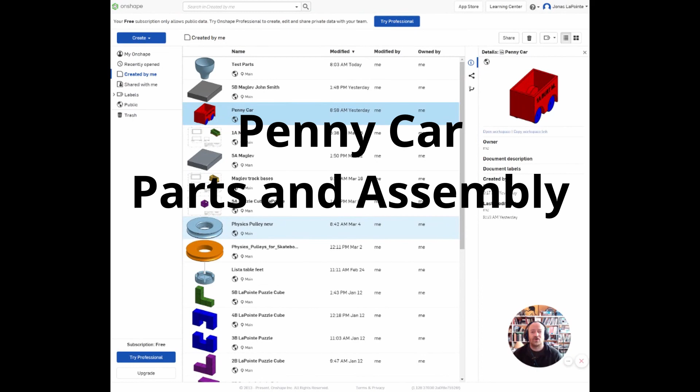For this project, make sure you review the instructions for dimensions in case they have been updated.

Let's get started. Just like all of our other projects, we're going to go up here to create a document. Let's name this your class period, penny car, and your name.

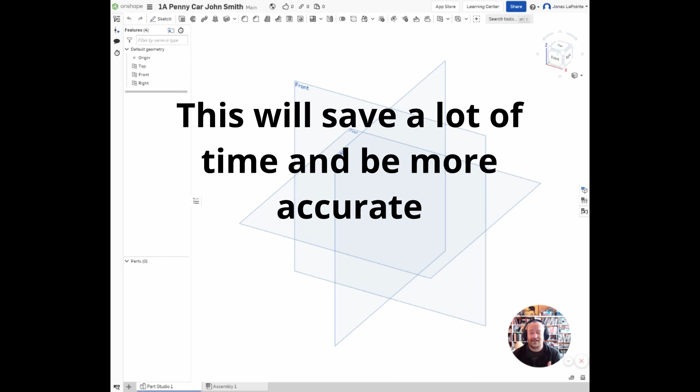Create public document. We're going to get this going in a similar way to some other things. One thing to point out with this project is we're actually going to only make half of the vehicle because we have to do some complicated things, and then we're going to mirror it. So we make half of it and then copy it to itself as a mirror image. It makes the process a lot faster. You don't have to duplicate the exact same commands on both sides, so as we get going here, you'll see what I mean.

So sketch is our first option, and we're going to do it on the top plane because we want this sitting on the ground. And we're going to use a rectangle tool, and again, just like normal, just drop something and we'll tell it how big to be.

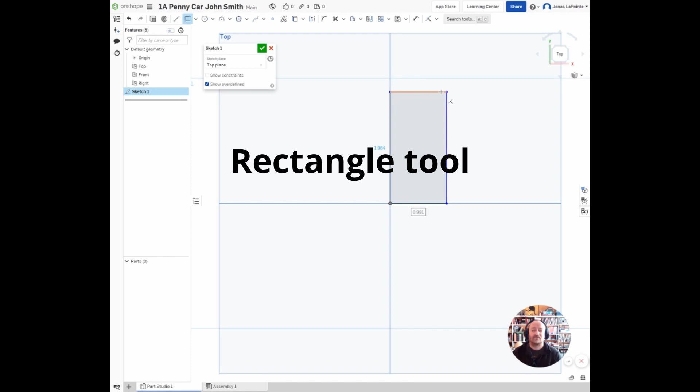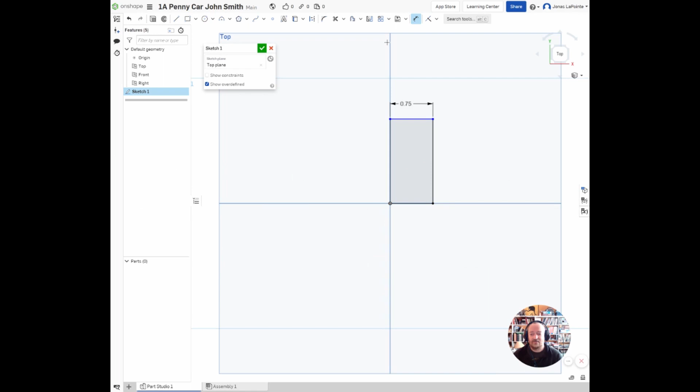Looking at our instructions, the width of the vehicle can't be more than 1.5 inches. Because we're only doing half of the vehicle and mirroring it, half of 1.5 is 0.75, so we'll use 0.75 for this. Our length is no more than 2.5, so we'll max it out since we want to maximize our cargo. So 2.5 for this. Now we have a rectangular shape and we're done with the two-dimensional sketch.

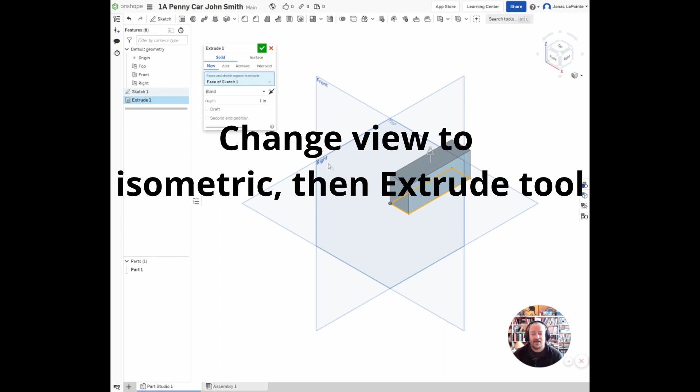We'll make it isometric and extrude this shape. The height you guys have some flexibility with. For my example here, I'll probably just do 1.5 inches. Don't worry that it looks extra narrow and tall—that's because it's only half as wide as it's going to be.

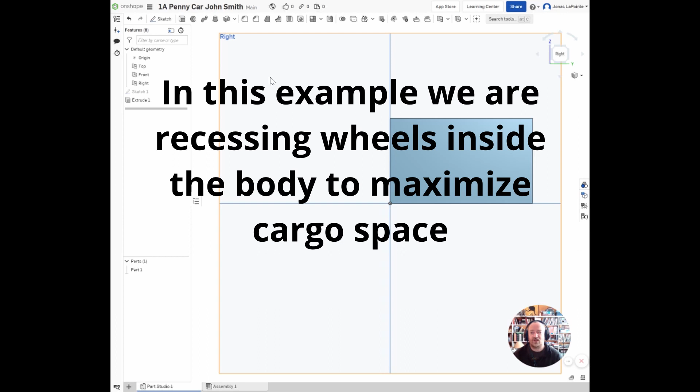All right, so that's done. Now we're going to do a couple things. We need to have somewhere for axles to go on this vehicle. We need to have the wheels in here, but remember our max width is 1.5 inches, and that includes the wheels. So we can't have the wheels stick outside this shape if we want to maximize our cargo. So we're going to cut wheel wells into this shape.

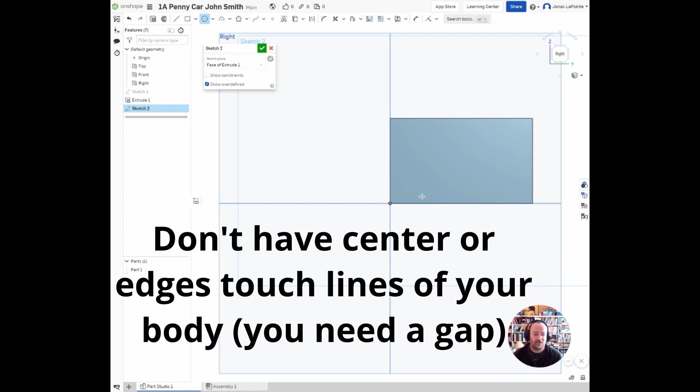We're going to use the sketch tool and choose this face, and I'm going to use the circle, center point circle tool. It's really important that when you draw this, you don't start it on one of these lines, because we need somewhere for the axles to go. So we're going to start it up a little bit and just draw something here, and we'll do the same over here. Don't worry about the exact size and placement yet—just make sure it's not touching those lines.

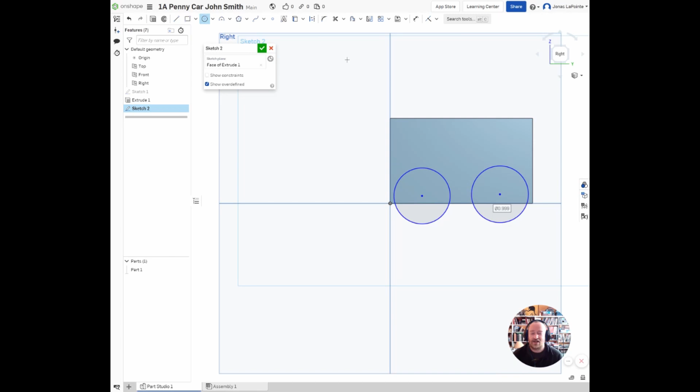Now, you need to have a little bit of ground clearance—at least over 1/8 of an inch. So we want to plan that in. You have lots of flexibility about what you do here. For this example, I'm going to make 1 inch wheel wells, so 1 inch, and I'll do the same with this one.

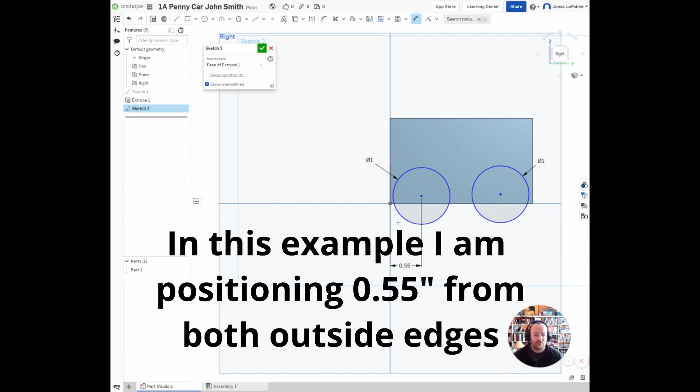Now I want to position these, because right now they're not in the same locations symmetrically to each other, and I think I want to do that. So I'm going to select the center point and the outside edge, and let's just make this some sort of standard dimension—0.55 is probably good, since I want to leave a little bit of a gap from the edge. We'll do the same over here if we want to make it symmetrical. It doesn't have to be symmetrical, but I'm choosing to do that. The other thing is, to fix a point in space, we need to do the X direction.

We also have to do the Y direction, so we're going to do center point to the bottom. Let's just make this 0.125, that's 1/8 of an inch. That's going to look pretty good. Same thing over here, I'll bring it up here, 0.125.

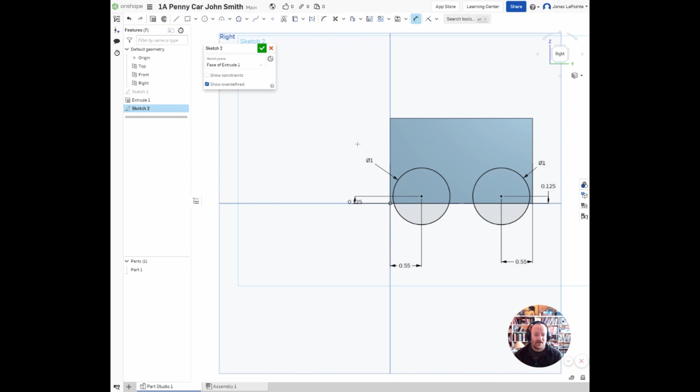So those are symmetrically placed, identical size circles, and we're going to use this sketch twice. Right now I'm going to click the green check.

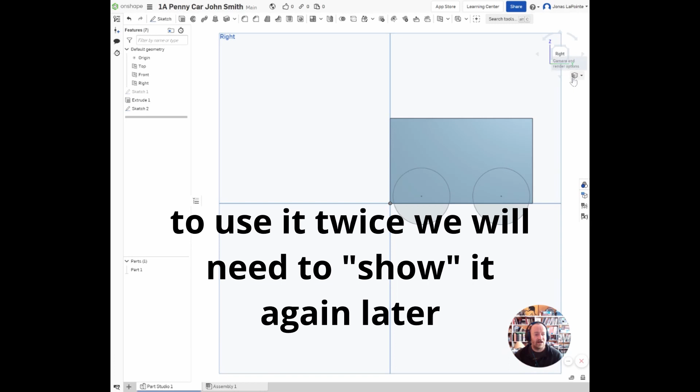We can see it's kind of ghosted out gray, we haven't done anything with it. It's showing up over here, still dark. But the sketch we did before is grayed out because it's consuming it. We can turn it back on to see it if we need to do something else, and we're going to be doing that with this sketch 2 here. So we're going to go isometric mode just to see what we're doing.

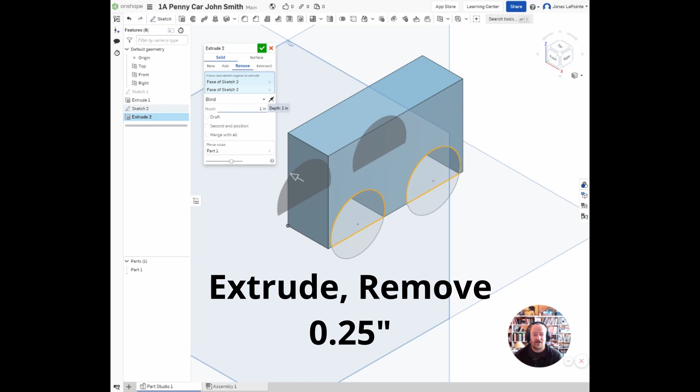I'll zoom in here a little bit. We're going to do extrude, and the first thing I'm going to do here is click on the circle and this circle. The order you do this doesn't really matter. Then we're going to click remove, and we can't go that far, but I'm going to want to go in 1/4 of an inch. I'll hit enter, and that's going to look pretty good.

So 1/4 of an inch, I'll green check that. And you notice that our sketch 2 grayed out, but we can click this to show it again.

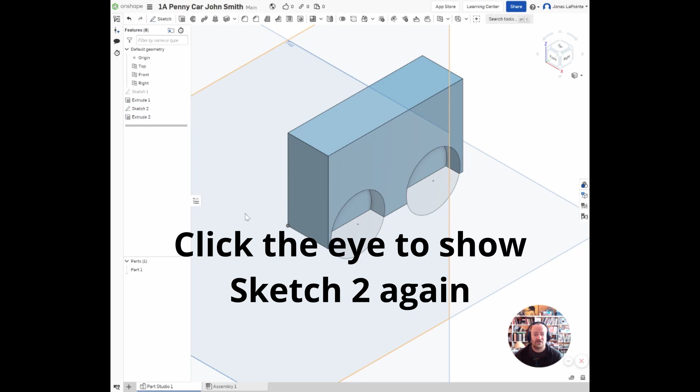So we want to do something else. We want to put in some holes for the axle. So we're going to show this, and we've got the ghosted out circles with the dots for the centers still in here again. So I'm going to click on the right face so we can work with this.

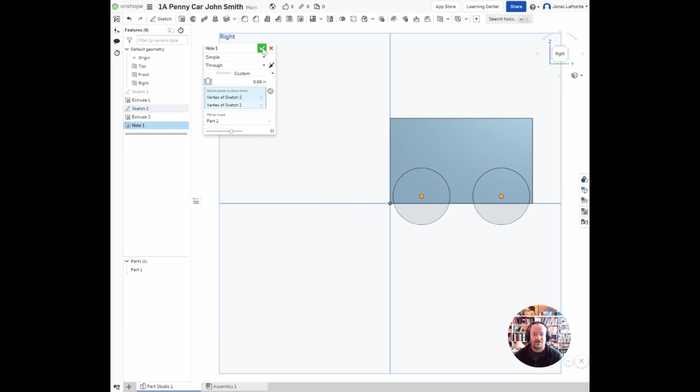And I can now go back to the sketch 2 and hide the visibility just so it's not kind of annoying when we're looking at it. So right now you can see that I have a half of a car that has wheel wells and axle holes.

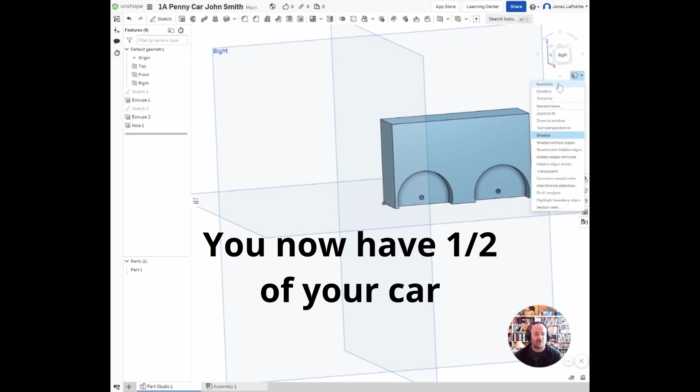Now this is the cool thing we're going to do next. I'm going to switch to isometric mode. What we want to do now is make this a full width vehicle, so we're going to use this tool up here called mirror. It's asking us for a couple things: what entity do you want to mirror? Well, click on your shape because that's what we want to mirror.

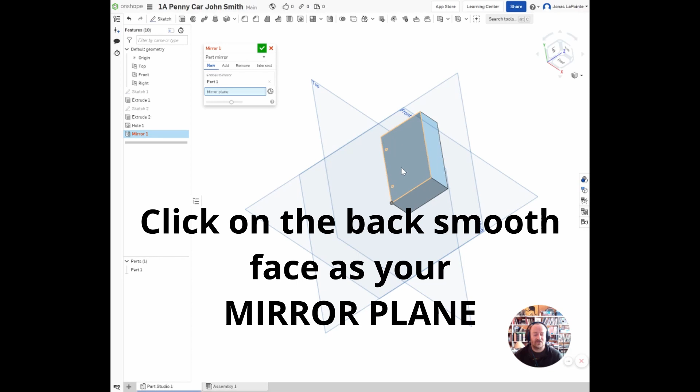And then the next thing is mirror plane, and we're going to roll over here to the back and click on this face that has nothing on it. And then we've got this whole thing here, green check and isometric, and we have now a full width vehicle. We didn't have to do those commands for the axle holes and wheel wells twice because we just mirrored half the vehicle. Highly recommend doing it that way.

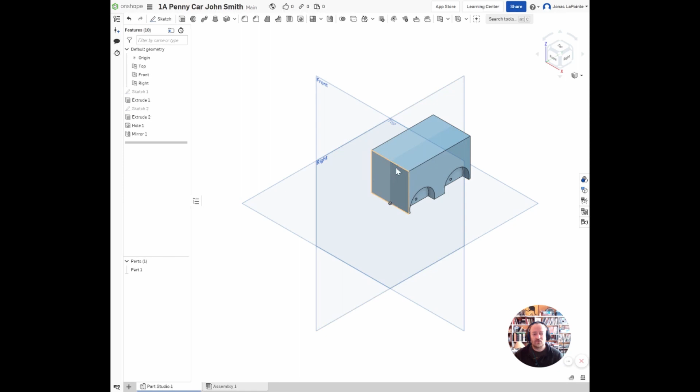Now, the other thing is, with this, we have to make a hollowed out box using the shell command, but we want to finish all of our commands first, and otherwise they can get cut out or the shell will do some weird things. So at this point is the point where we're going to use shell.

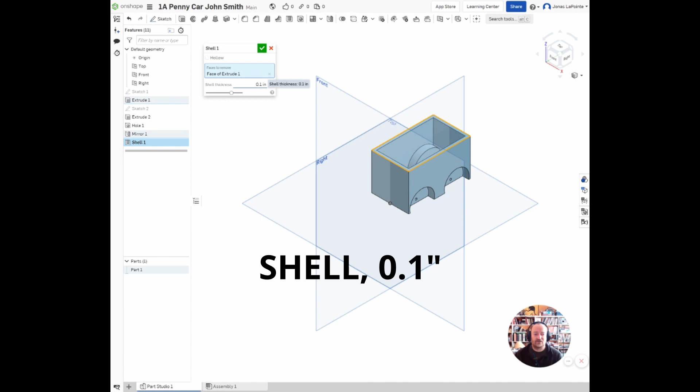We do have to do one more thing for our names, but we're going to do shell and clicking on the top. And the standard 0.1 is good. If we look down inside here, you can see that, hey, it's shelled down to the wheel wells and the axle holes. So those are kind of protected by a layer of plastic, which is perfect. We can load up our cargo of pennies in here, and this will work out well. So I'll say that's good, green check.

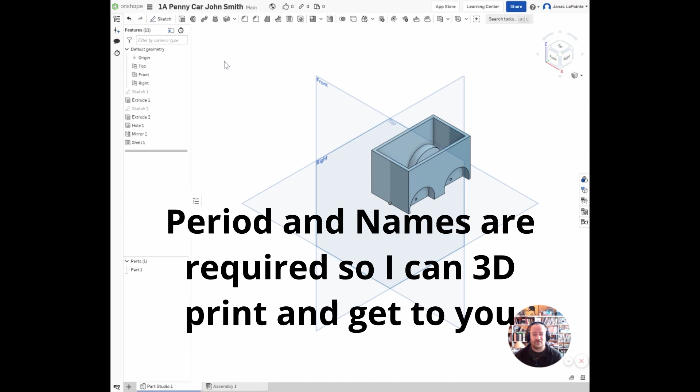And isometric again. The last thing you have to do on this is put your name on it. I have to have this on here for giving you back your stuff. We need to make sure we can get these to you. So sketch, we'll pick this face, and I'll rotate to that face. And we're using the text tool again, like you've done for some other projects.

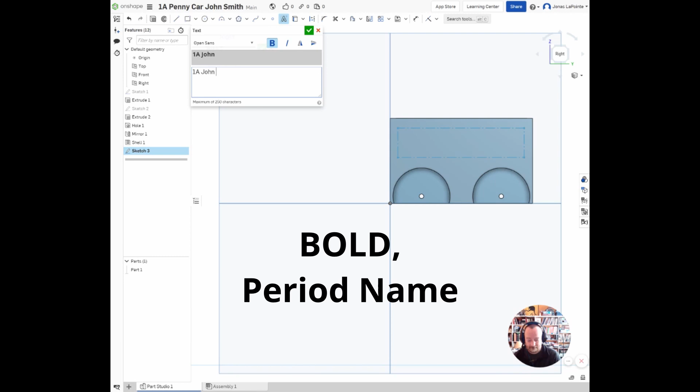Again, do a box, but inside the lines. Don't touch the lines, otherwise you'll have trouble moving it again. We'll make it bold and just something really simple, like 1A. If you have just a first name that's unique in your class period, then you could use that.

The purpose of this is just to get it back to you. Again, just like the last project, the name's really big at first, but we're going to fix that up. So dimension tool, we'll pick this top line. We know our vehicle is 2.5, so maybe 2.25.

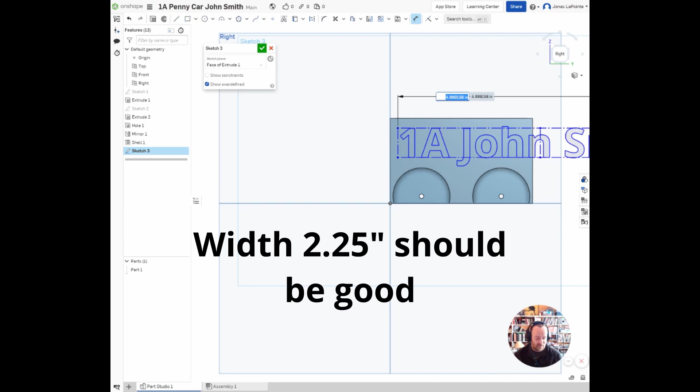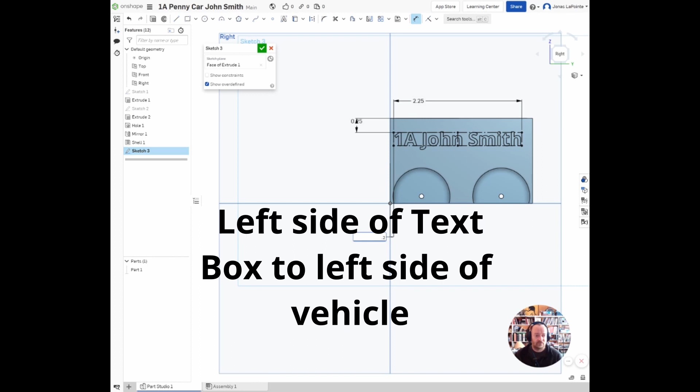And then we'll start kicking this back up. So top line to the top of the box, maybe 0.25. And we'll kick this over here too. I don't know, maybe 0.2. That might be too much. We'll see, a little bit too much. I'll turn the dimension tool off. Double click this, 0.15, or maybe just 0.1.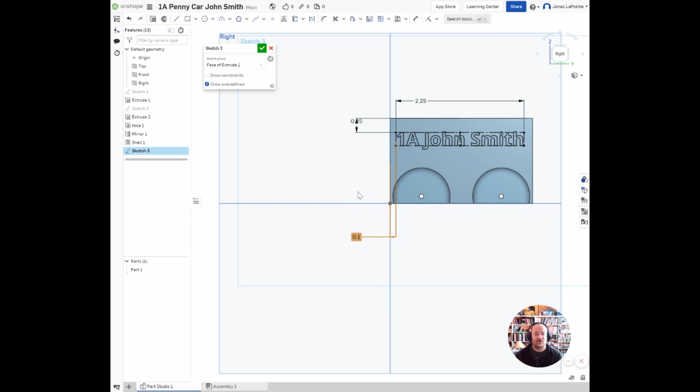Anyway, yours is going to be different. It's going to be whatever looks good to you. I'm not terribly particular about how perfectly centered it is, but that's looking fine for these purposes. So we are going to green check this.

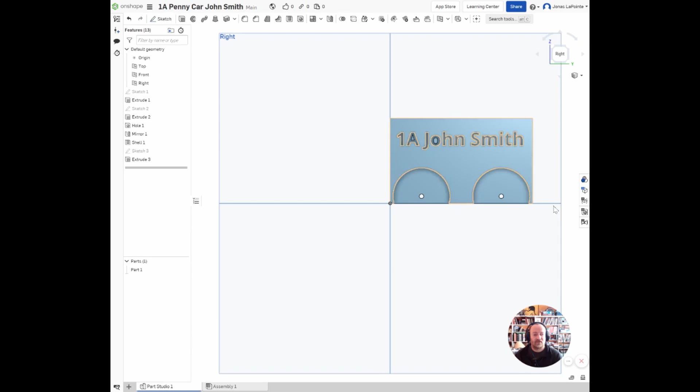We are going to do extrude, pick on the letters, choose remove, but we do not want to remove 1 inch because we don't want to go all the way through. We want to do 0.05 because the wall thickness is 0.1. And green check. And I'll isometric view that, and we have our letters carved in, but only carved in partway.

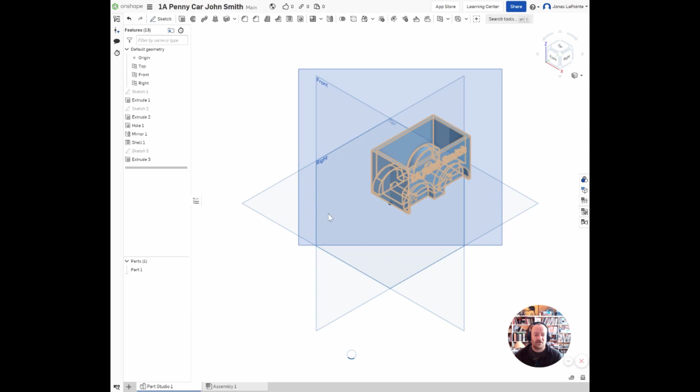The next thing we want to do, just like the other projects, is we're going to give this a color. Now again, I have colors available, if I haven't updated you with a list of colors for this year, for this project, pick something for now. We can always edit it later. Once you select it, right click, edit appearance, and pick a color. For this project, I'll pick yellow.

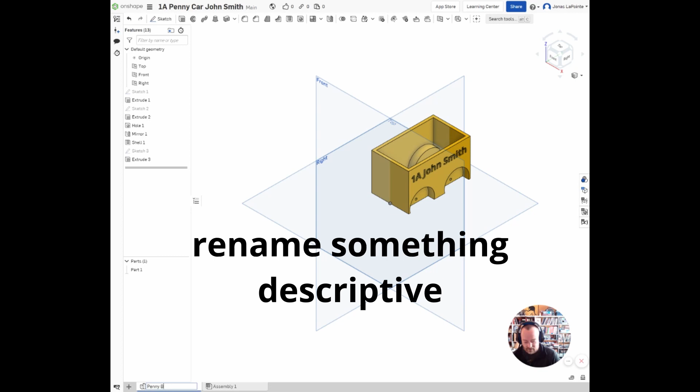It will make our drawing stand out better, and we'll have wheels that are a different color, or they may be the same color, but for our drawing, they'll be a different color. So right now, that's good. We have this. We'll rename it, so Penny Body or something similar.

Now the next thing is I have to make wheels that work for this, so let's make some wheels. Make a part studio. And we want to make our wheels so that they're oriented the way that they will fit on the vehicle with the least effort for the assembly. So we're going to do a sketch, and we're going to do a sketch on the right plane so that we can have them.

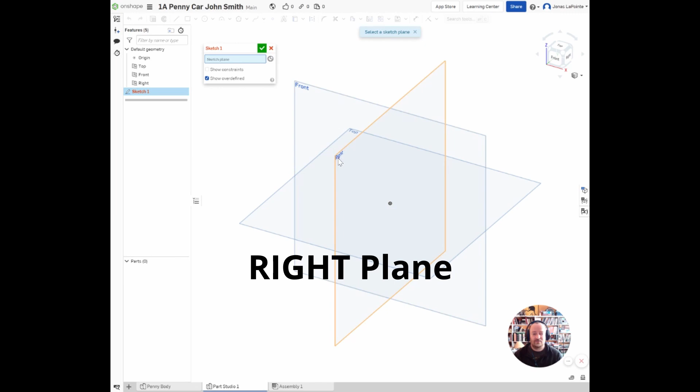Oops, yep, and then click on right over here. I had this selected, but it didn't need to be. Okay, there we go. And we're going to do a circle. And again, just like the maglev vehicle project, you only need to make one wheel as long as they're all the same size for your vehicle, because you'll just bring in 4 copies of it. So make any size here, and then we're going to make it fit.

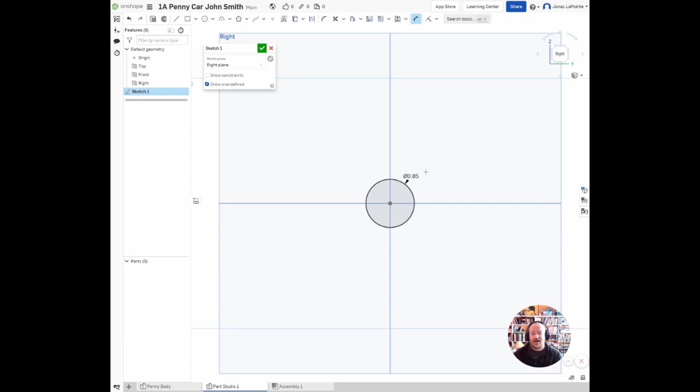Our wheel wells, remember, were 1 inch, so it has to be smaller than that. I'll do a 0.85. And one of the things to consider is, the diameter is 0.85, so the radius is 0.425, and we want to have ground clearance of at least 1/8 of an inch. So that should be plenty, even though our axles are not at the very bottom of the vehicle, they're up a little bit. This should be cool for ground clearance.

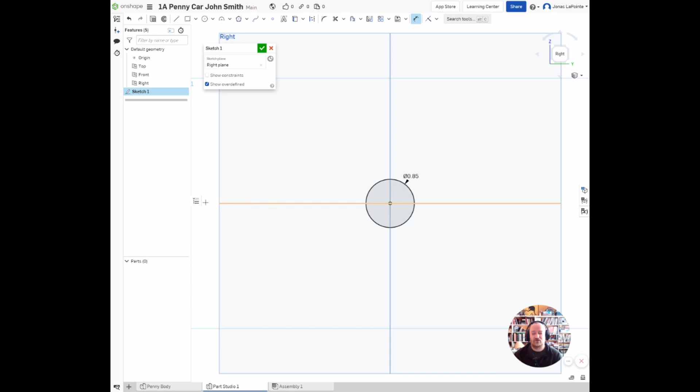If you're going with super tiny tires, just make sure that you have designed something that fits and gives you the ground clearance required according to the instruction sheet.

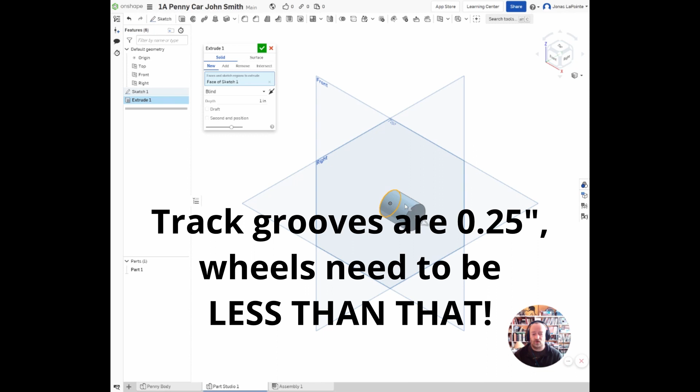Now, the width. If we look at our instructions, the track grooves are 1/4 of an inch. Do not make wheels that are 1/4 of an inch, because they're going to get jammed. Instead, make them smaller, 1/8 of an inch is fine. You can type a fraction as 1/8, or it's 0.125. That will be plenty of room. You can make them a little bit wider.

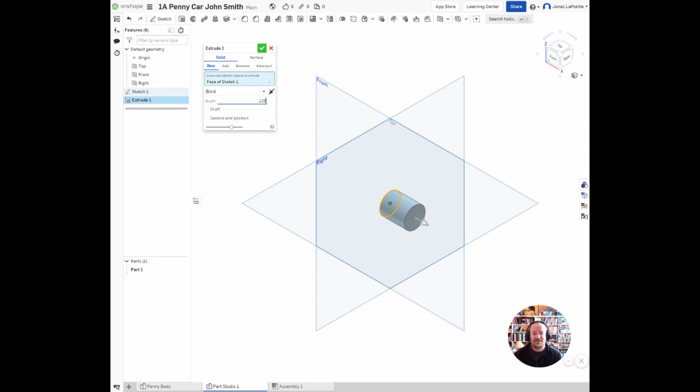You need to leave some room so that there's some play in the track. Otherwise, they can get jammed. And if we look at this, we have a solid shape here. And the last thing we need is a hole for the axle.

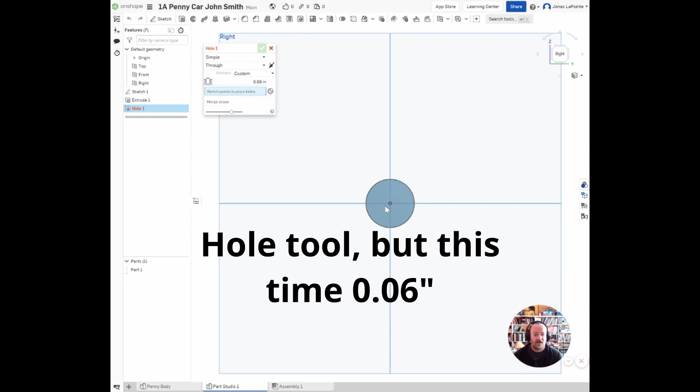So we can do the same thing we did before. We're going to turn Sketch 1 visibility back on, show Sketch 1. We're going to go over to here, and we're going to click hole. And this time, 0.08 is great for the hole through the body. We'll make it a little bit smaller for the wheel. This should work out well for having the paperclip hold the wheel to the body.

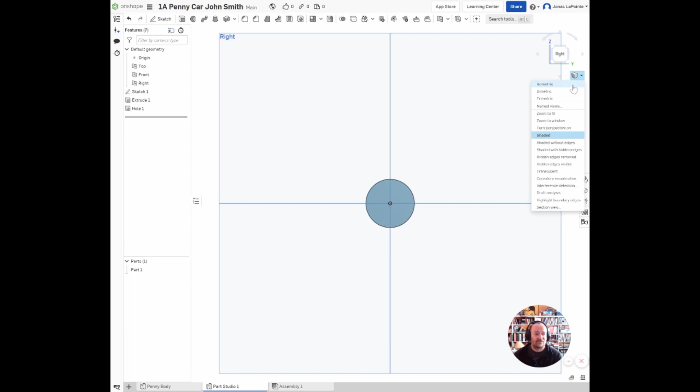0.06 is probably good. Green check that. And then we're going to pick a different color for this, something that works well. It could be any kind of color. I'm probably going to just print batches of wheels of the same color as your body, but let's make it a different color for this project.

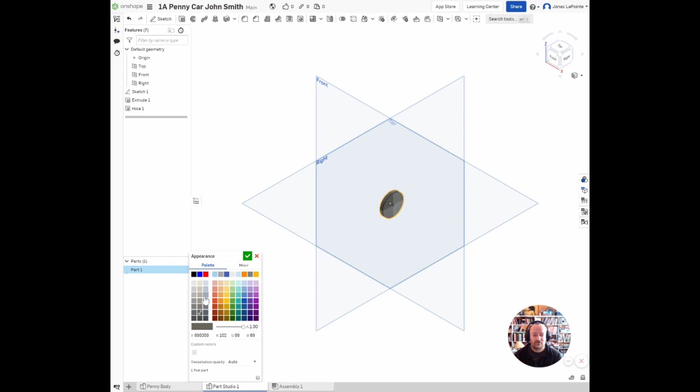So let's see, I have a yellow body. Here I'll do like a dark gray wheel, and green check. Okay, so I'm going to rename this one wheel.

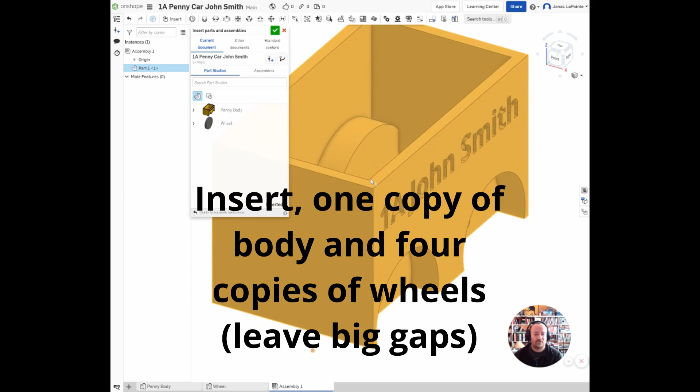And we're going to go to our assembly. So on our assembly, we are going to insert, and we have a penny car body. I'm going to zoom out, and we have to bring in 4 copies of wheels, and just stick them kind of like roughly on the sides where you're going to use them. It'll just make your life easier later.

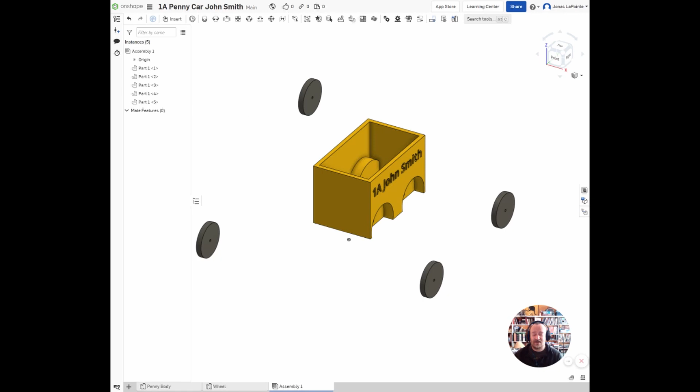And I'm done dropping parts, so I green check that. Now, for this purpose, normally in a normal year, I'd have you make axles and have them stick them on the axles and make them spaced from the vehicle and stuff. But we're going to just simplify this because we're having to do some stuff remotely this year.

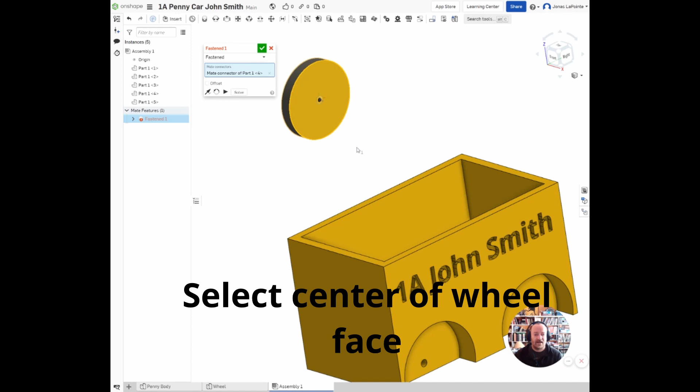So we're going to use the tool we have used before called Fastened Mate. We are going to select the center point on these. If you hover over them, it's kind of going to jump to the center point. So I'm selecting that face. I want to roll around to this side of the vehicle, and I want to do the same thing on this axle hole. And I'm going to green check.

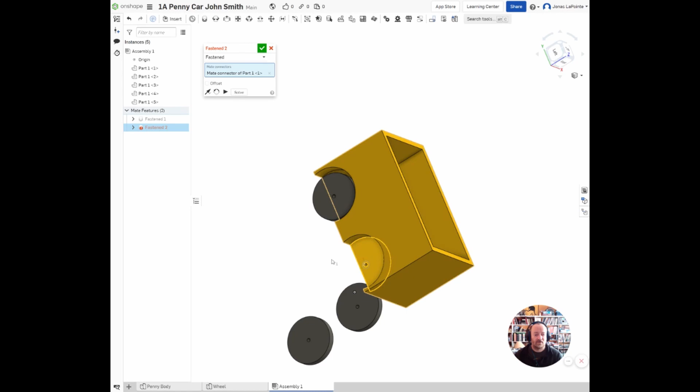And then we're going to keep doing this. The order doesn't matter what you select first. So I'm going to say, okay, I'll select this. Oops, I have to turn the tool back on though. So here we go, tool. And an opposing face. Don't worry that it jumps around in space, that's okay. And green check. I'm going to do the same over here.

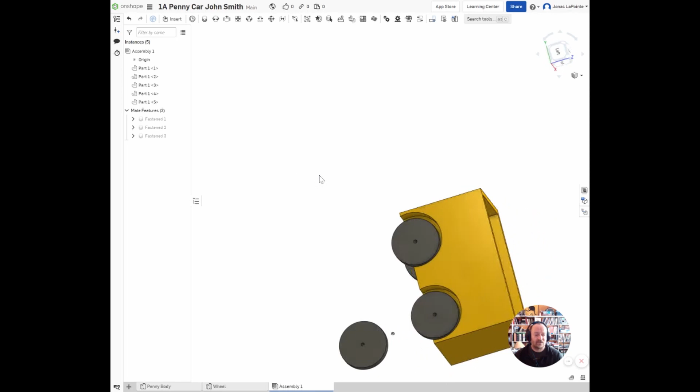I've got 2 more to do. So center point. Don't worry, stuff will be fine. And last one, I can start with this side. So fasten mate, and green check. Okay, this is a very basic vehicle.

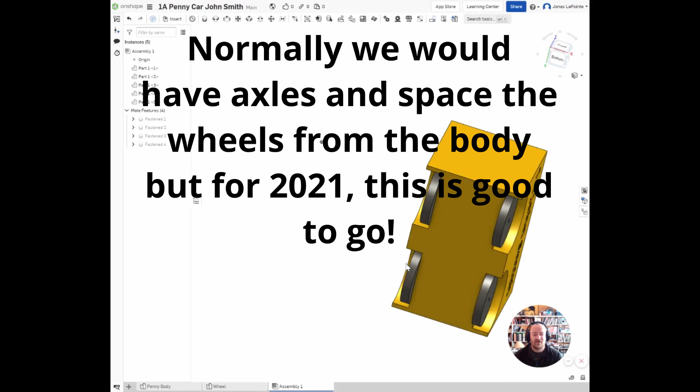It does work for our purposes. It has wheels that are kind of stuck into place. They are right up against the body. When you assemble these in reality, you'll leave some play there so that it can move down the track and not get jammed. Right now, the space between these wheels on the insides is exactly 1 inch, so that's a little bit tight for the track. But when you leave a little bit of a gap, it'll work out great for the project.

So there we go. I'm going to do the drawing in another video, but that is the penny car.